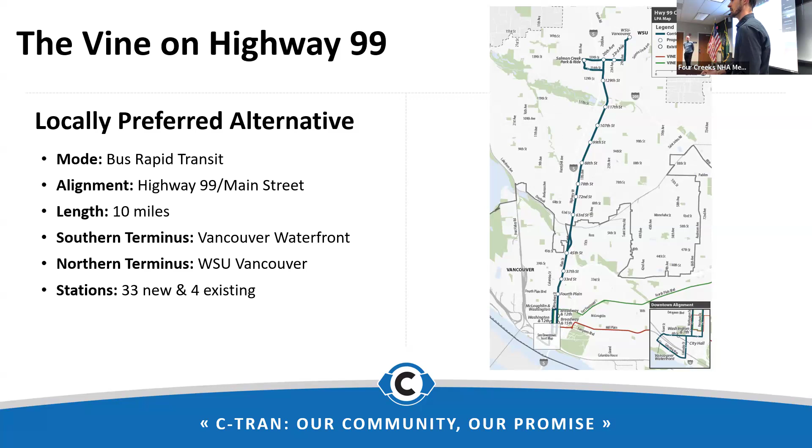For Highway 99, the alignment will stretch all the way from the waterfront in Vancouver through Hazel Dell and Salmon Creek with a terminus at WSU Vancouver. It's about a 10-mile corridor, a straight shot you cannot currently do with a one-seat ride, as the system now requires a transfer. The corridor will have 33 new stations plus 4 existing stations downtown shared with other Vine routes on Fourth Plain and Mill Plain.

Zooming in to the north end, closer to this neighborhood, there will be a handful of stations in the Salmon Creek area north of 117th Street. That includes Salmon Creek Park and Ride, which will be rebuilt and remodeled as part of this project to be more of a transit center. Previously, the Park and Ride was mainly for a couple of commuter routes going straight to Portland, with folks who worked over the river parking there and riding all the way down. With this project, the idea is to connect more local routes in the area to provide better connections to the Vine and elsewhere from Salmon Creek.

There are also a couple of stations along 139th Street at 20th and 23rd Avenue near Legacy. The terminus station would be on the campus at WSU Vancouver, currently served by Route 19, which has a stop adjacent to the campus on the west side at 29th Avenue.

Zooming in even more, the station at the campus would be a big change from what's there now. That stop is currently just on the street on 29th. With this project, the idea is to build a dedicated busway going up onto campus from 29th, doing a turnaround where the main loop road comes in from 139th. The station would be right against the road, with a bus-only lane allowing access to and from 29th Avenue.

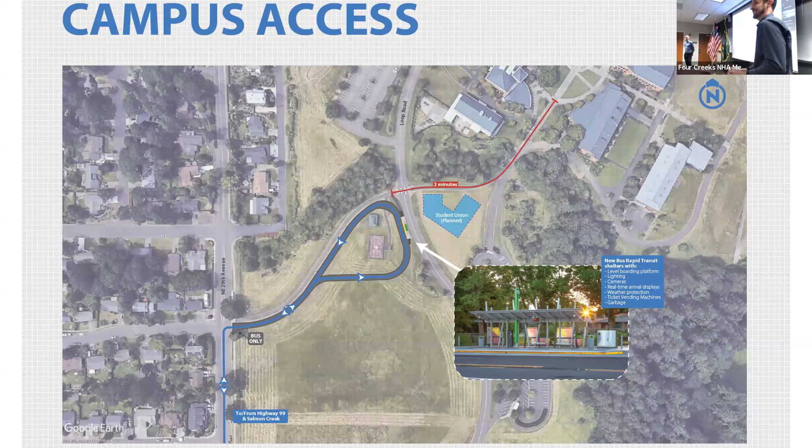It's the cross street here, is it 51st? 148, 140, yeah, you're right, 51st. Okay, I'm not sure what that is. That's okay, you'll probably know better than me. He knows. Okay, next slide, please.

Eric, that path that exists now, it looks like that graphic implies it's going to stay open as a walking path. Correct. Yeah, the busway would essentially be adjacent to that walking path, so it would still be available for folks using it today. To back up a little bit on the timeline of this project, that arrow is not quite where it's supposed to be, but we're potentially right in the middle right now.

So 2022 is when the project really kicked off in earnest, when we started the initial outreach to let people know this is an idea we'd like to do for Highway 99. That's when we gathered a lot of feedback from the business community, residents and others up and down the corridor, really going door to door. We had a series of open house meetings, both in person and online. And ultimately that led to the adoption of the locally preferred alternative for this project, which was last year.

So that really solidified what the high level plan was. And since that time, we've been in the more detailed design phase, getting into the weeds of what each station is going to look like, where it's going to be in relation to each intersection, what the design is actually going to take shape as. That's where we're at right now, about 90% design. So we're getting close to the finish line in that phase of the project.

And then the plan right now is to go into construction likely in the first half of 2025, with an anticipated completion in 2027. One thing, actually the next slide covers more detail on construction.

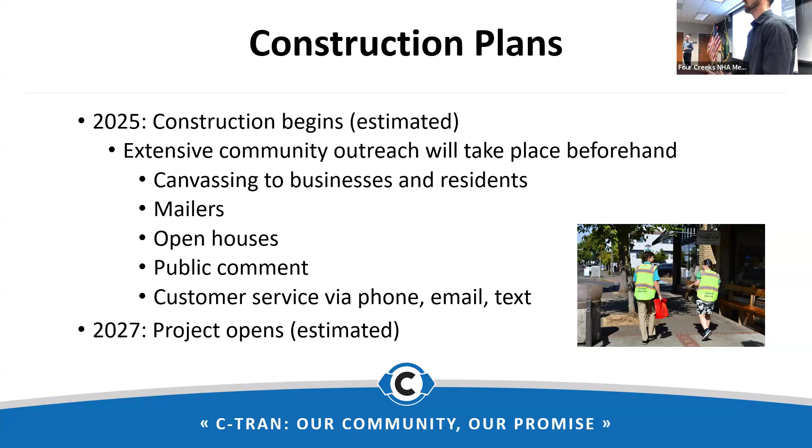Good question. Yes. Have you looked at any of the other projects, like all the ones that we're going to be talking about after yours, and looked at the impacts there?

Does C-TRAN work with the county and other groups? We do. We make sure that if something's happening nearby at the same time, we'll either try to avoid each other, or in some cases, like with Mill Plain, they had a big project tearing up Broadway, and we deliberately did our construction at the same time while that was already closed, so it didn't create an additional impact. We coordinate depending on what makes more sense for the area.

There's major stuff going on at 29th. We're losing some access points, and this could impact things. Appreciate you knowing that. We'll make sure we're coordinating as needed.

The reason was, with the analysis we did of travel time and the number of traffic signals it takes to get in and out of that site from Highway 99, it would have added close to 10 to 15 minutes each way, going up and down both directions. Ultimately it was decided that's just not worth the added time for a system intended to create more efficiency and a faster trip for folks generally traveling through that area, not necessarily going to 99th Street.

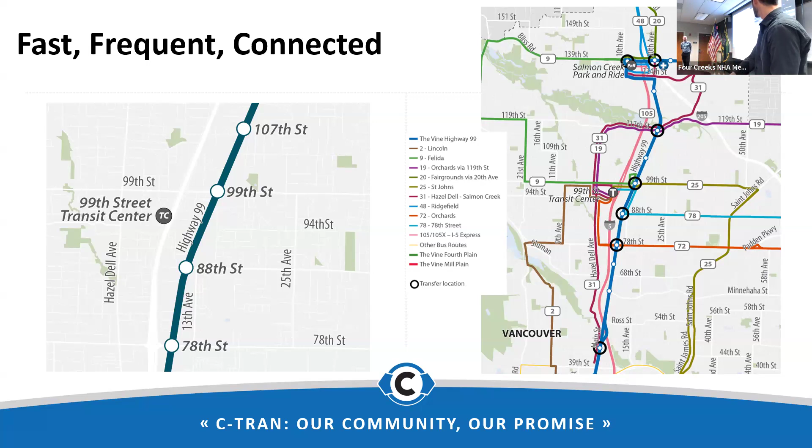Next slide, please. And then the last one for me - just to back up again, on Fourth Plain, when we built that project, Chuck mentioned a thing or two about that if you ever want to ask him about it.

That was the first Vine corridor that C-TRAN built, because Fourth Plain at the time, and today still, is by far the highest transit ridership corridor in our system. Mill Plain was the second and is the second highest ridership in our system, so that made sense for the second corridor. Highway 99 is the third, for a lot of reasons including ridership, but also the forecasted growth of thousands of households and thousands of new jobs in the next two decades, potentially.

We've got a corridor overall, not just on the north end of Salmon Creek, but the entire corridor that exceeds averages in many of the community groups that historically use transit, such as folks who live in or near poverty, folks who identify as minorities, and 10% of the population on this corridor does not have a vehicle, which is twice the rate of Clark County as a whole. So it really fits a lot of the criteria to make it a good candidate for this type of service that would benefit a large number of people.

And the corridor as a whole has a really wide variety of different types of environments. There's a lot of commercial, residential, some major destinations, grocery stores, schools, urban areas, a little bit less urban. So it's really an ideal transit corridor for that reason, just because of the diversity of the environment that it serves.

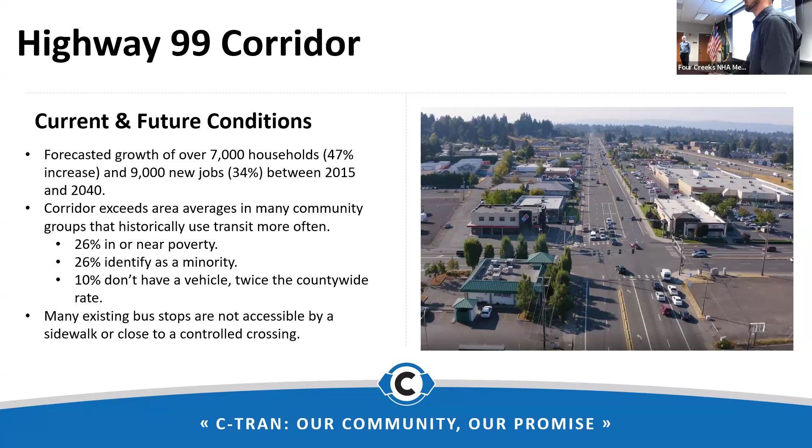With that, I think I'm going to turn it over to Jay for the rest of this presentation, and what to expect once we get toward construction on this corridor specifically.

Thank you, Eric. Hi everyone, I'm Jay Houseguard, Community Engagement Coordinator with C-TRAN. I'm going to talk through some of the specifics of bus rapid transit, and then what the stations might look like, some of the cool features that are involved as well.

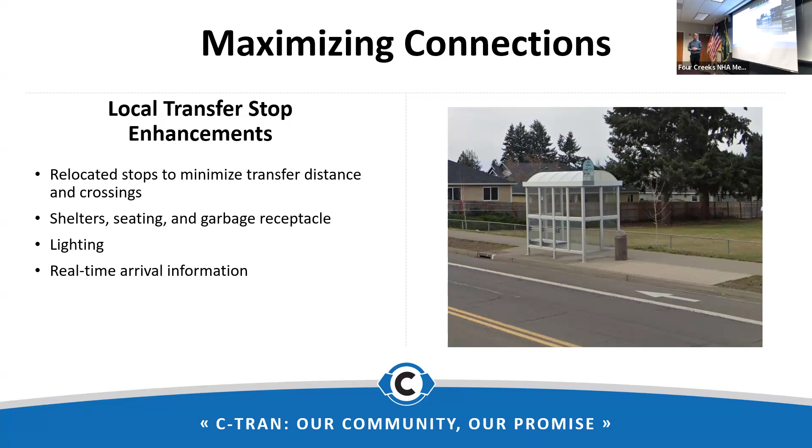Rather than checking in with the operator, the bus driver at the front, you can actually just get on through the doors in the middle or rear of the bus. You can buy your ticket ahead of time—there's a pay station outside before the bus gets there—or you can pay with a HOP card as you step on. You don't need to interact with the driver, which creates a much faster process. And that's what this is all about, efficiency.

It comes more frequently, even on the busy corridor, than some of our other bus routes. So just a lot of enhancements. An example here is the windscreens, protecting from the elements. There's additional seating, a trash receptacle, and the real-time arrival information is on the screen there. There's overhead lighting and a security camera up above for safety.

And then the platform itself is also more level with the doors to get onto the bus, so for someone with a mobility device or a bicycle, it makes for a much quicker access point getting on board. There's also three bike racks on board, whereas on our traditional buses you have to pull the bike rack down in the front.

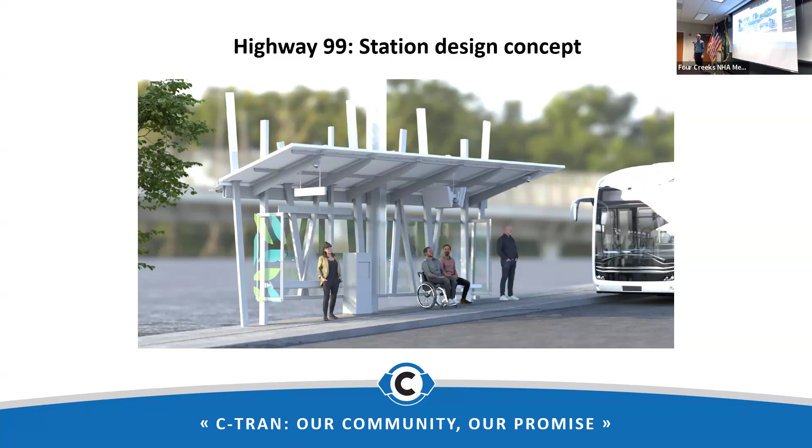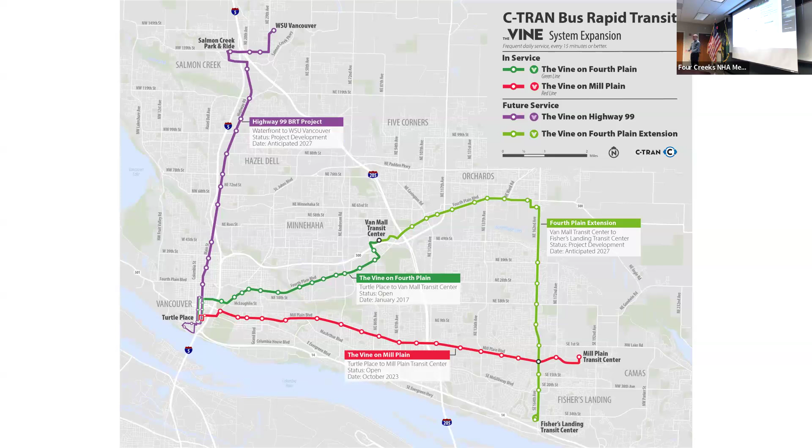That's great, it's exciting, and they really are successful. We found that after the first Vine on Fourth Plain was built, very soon after there was an increase in ridership for what we call revenue ridership - revenue producing rides shot up soon after it was built. Everyone was excited about it. It really helps with operating costs and the efficiency of transporting so many people on a higher capacity bus.

That's the end. Yeah, questions?

So what does this do to the existing routes? Are you reformulating those based on these new Vine routes? Yeah, so an example is right now on Highway 99, we have an existing bus route, the 71, and this is going to replace that, and really allow for better connections into the larger system. You can go all the way down to the waterfront - right now, 71 doesn't quite even get to the waterfront, it gets to around Esther Short Park, City Hall, but this will take you all the way to the water. It'll connect into the system we have, ideally with that one map where you saw the larger black circles connecting into other routes that get you east and west as well.

Usually a major project like this does involve some sort of realignment of the connecting routes too, just to make sure everything works as well as possible. This project specifically will replace the 71 and the 19, which serves Salmon Creek right now to WSU. Once we make those other local route adjustments, it won't be done in isolation. Mill Plain, for example, when we opened that Vine corridor last year, it coincided with the opening of an entirely new transit center on the east side of that corridor, and we shifted a couple routes to make those connections work as well.

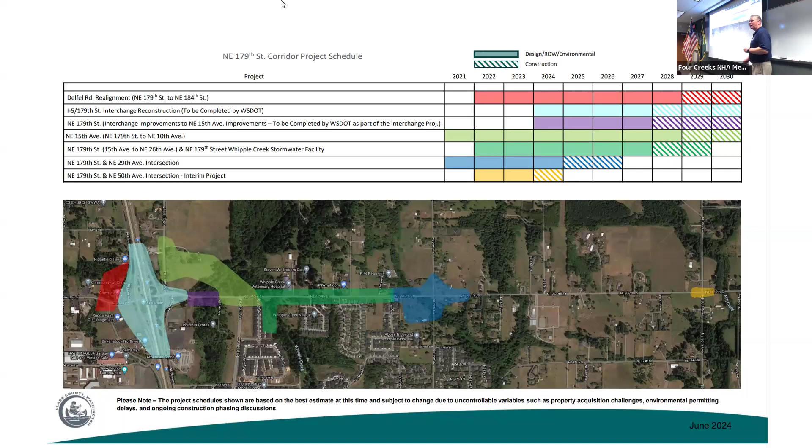Yep, let's jump to the next one. I'll go all the way down this pipe for you, I'll take you all the way down. So this is the big picture, okay?

The one thing I do want to make sure you understand is that this is the long-term project at 50th. We did an interim project where we added those left turn pockets on the east and west leg. This is what that eventually will be going in. You can kind of see it now, Phil. The plan is to line the north leg in with the south leg.

The interchange is going to be coming in, fixing the on and off ramps. We'll have the section between the interchange and 15th, which is going to be a multi-lane roundabout there. And then we'll be bringing 15th Avenue up, because when the interchange comes in, it's going to eliminate the connection of 10th into 179, and the same thing with Delfel. That's why we're getting those out of the way.

And then, as I mentioned, there's the stretch between 15th and 29th, and the improvements at 29th. This shows you the contour change that's going to happen for the alignment in order to get it up to the standards needed for this type of traffic flow. Next slide—oh, go ahead.

What's that big dip there? This one right here? Yeah. So as you go past 29th, you go down a big hill—there's the horses and stuff. Yeah, or a bridge, most likely. Bridge, yeah.

So Scott, just with the apartments going in at Southbridge...

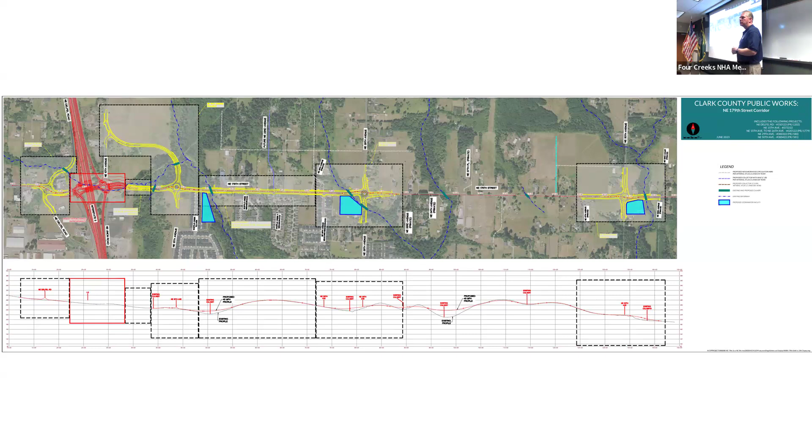Okay, next slide. So this is what I mentioned about at 179th and 50th. We're just wrapping up construction on this one now. For those of you that were inconvenienced, I apologize. Les will talk about his sewer work and the closure at 29th. We have this one going too, so if you lived in between, there were times that you were affected. I apologize for that, but I think it's going to work a little bit better. It's supposed to last until about 2035, based on traffic volumes, at which point it needs to go to a larger roundabout.

I do have a question about this though, because on the east side, northeast side, it is so steep. They did not put a railing on that side. It is there now — if you're talking about the guardrail, we had to wait till Lumen got out of our way. Is it there today?

As of today? Yes. If you're talking about right here — I didn't go that way today. Yes ma'am, go — okay, it's there. I'm so happy, because yesterday, but not today. Every time I drove on that, I was like, oh dear. I know, it was scary. Okay, so they put guardrails there.

Yes. County is not alone with Lumen — we've had so many issues in Ridgefield. I think they had an implosion internally. That's the only thing I can think of. Okay, so we're done here, that was that first one.

What's the yellow grid across there? Right there, all that — wetlands, I think. Most likely. And typically what you see, I think, is property boundaries and those kinds of things.

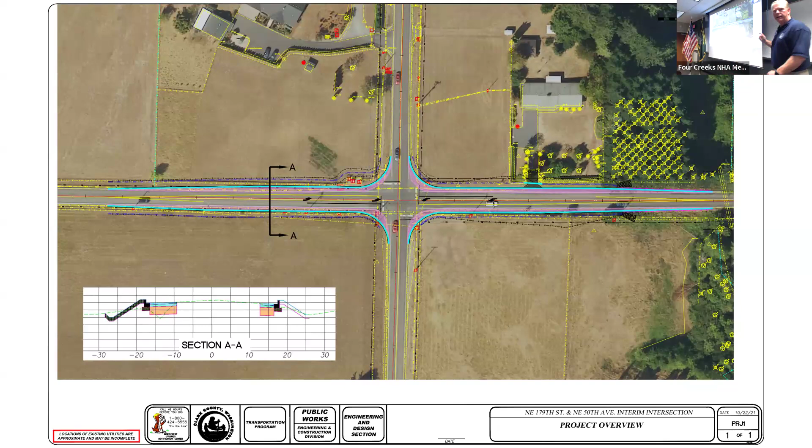So this is the big one you're going to be seeing over the next two years — 179th and 29th Avenue. Right now it's a signalized intersection. The topography is pretty tough. We're coming in, we've got two bridges to build, one here, a big roundabout that we have to level, and some pretty good sized walls we're rebuilding. It's going to be a pretty big construction — roughly 18.6 million is our engineer's estimate right now. It's a big chunk of change, a big investment for our community.

What I'm going to show you next: when we do a construction project and put together plans, we have to put in place, if it's a rather complicated one, a staging plan that we give contractors to bid on, so everybody bids on kind of the same thing. What I'll show you is our proposal of what that staging will look like. We want the contractor, once under contract, to tell us if there's a better way to do it. So understand this is our idea — we may come up with a better one because we don't know their resources or tools. Hopefully they'll give us something that opens that road up three months earlier, that type of thing.

Sir — when I'm up in the new Costco area, I'm just moving into this area new, so pardon my ignorance, but it seems like roundabouts are more of a liability than a help. Why are they doing roundabouts as opposed to actual stoplights? Well, people have different opinions on this, but what I've been told is that studies show roundabouts are safer and less expensive in the long run.

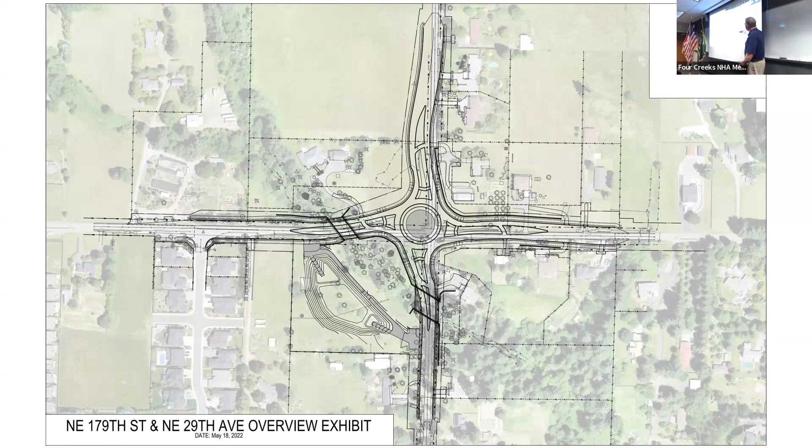Okay, so what you're going to see next is the staging plan that we're going to put into the construction documents for them to bid on. Ready? All right, first year.

So probably a whole year, they're going to be focusing - we're recommending they focus on the south, west, and southwest area. So the south leg, west leg - build the bridges, build the stormwater facilities, get this all built. In the meantime this stays open for traffic, but this will close and this will close, for the first year. That's what we're estimating, because you've got to build 2 bridges.

You've got to do a lot of grading, you've got to build a lot of walls, it's a lot of work there. And we have restrictions on when we can work in the water. Right, okay, that's first year.

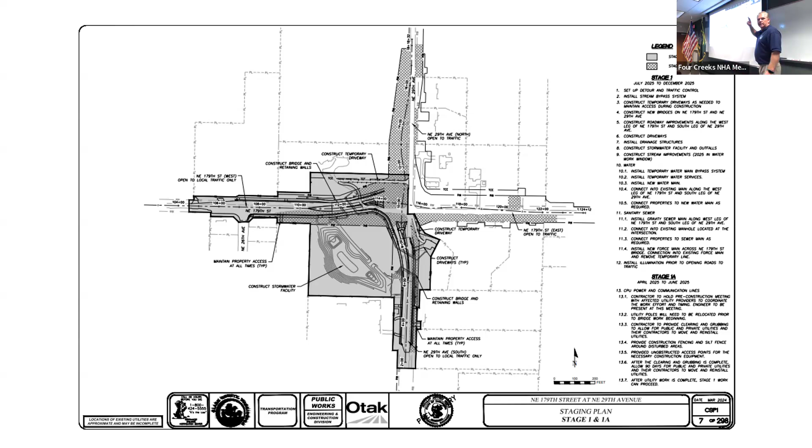Next page - then we're proposing that they move over to the east side and then the north side. At this point we're closing the whole thing, and this is going to take about 6 months.

Next one - and then this is the final phase, final 6 months, focusing on this last leg on the east side and then finishing up on the north leg. At this point the south leg, west leg, and north leg are open, and then this would be closed.

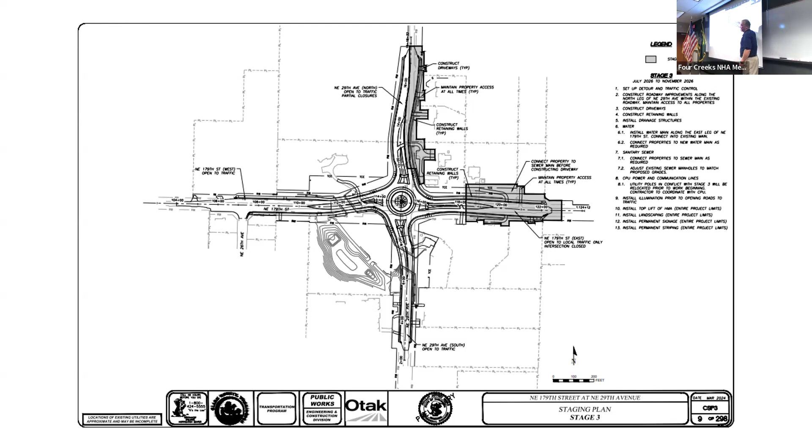So what I'm hearing is the people that live east of 29 are not going to be able to get down 179 for 2 years. Did I hear that right? That's what I'm seeing, I think you're accurate. Yes, you're right.

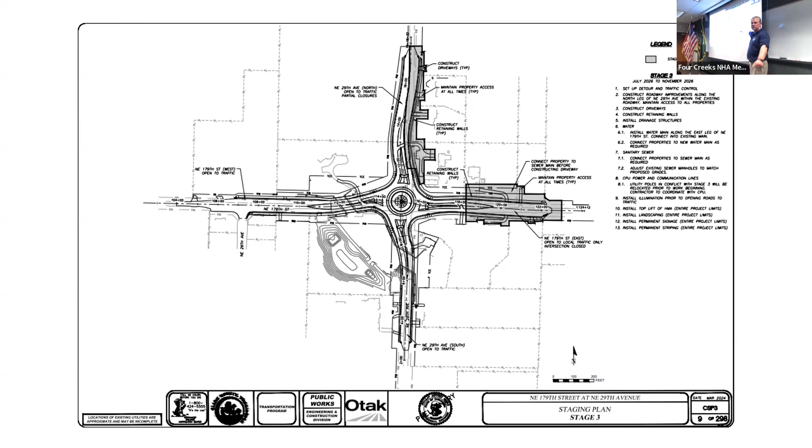Okay, so next let's talk about what the detours will look like. So we talked about that first stage - what will be required then for through traffic, bringing you up to 199. Okay, next stage.

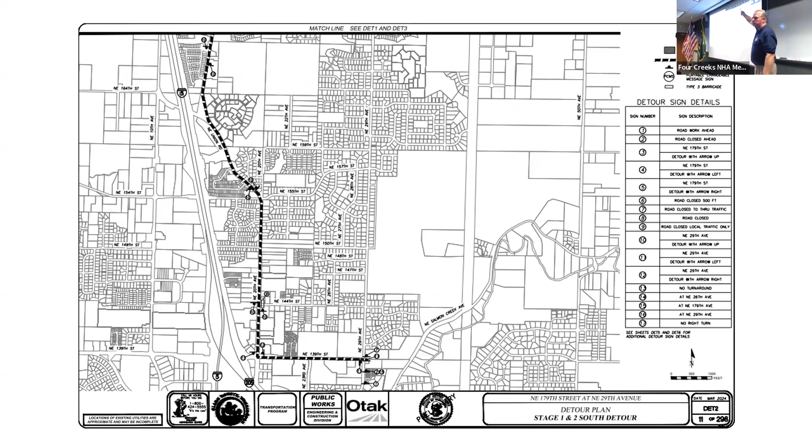On the south side of 179, what we'll be recommending is people go over 139 up to 20th, without 15, because they won't be able to access 20 to go through.

During that second phase, at this point we've closed off all lanes, and now we're diverting you over to get through. The south side pretty much stays the same - just clarifying that for my notes.

So the portion where it's going to be closed sounds like it was between the end of year 1 and 6 months - it's basically the 6-month period, right? That's right.

Battle Ground School District picks up kids just south of 179, on the east side of 29. So they're gonna have to go - what's their route to pick up the kids? That's the only route they have, there's no other roads. All the way up to 199, across 10th, down 15th to 158, and then back up.

How are they gonna pick up my kids? I live on 47, my kids are gonna be in kindergarten next fall, but 47 is right there. So they're gonna have to put down 50th and back - how are they gonna turn around?

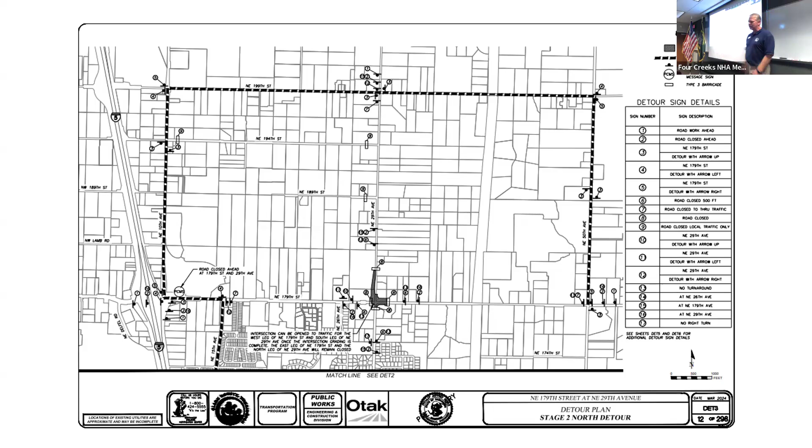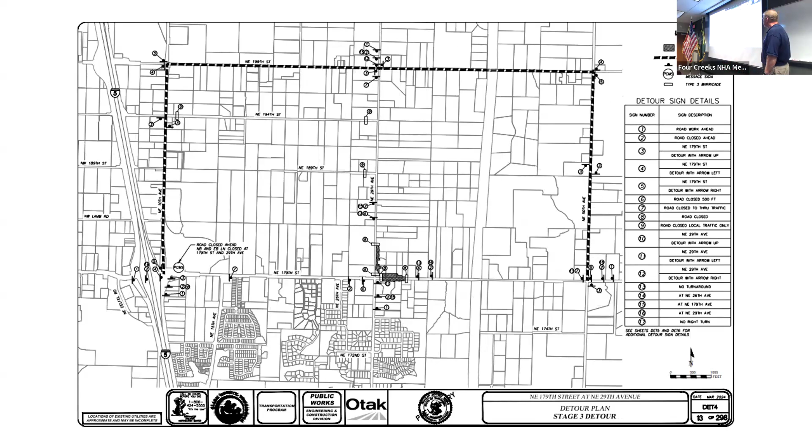This is the final leg. At this point now we've opened up the south leg, and then this leg is open, but this one is still closed. Right, so we'll still have that open.

Well, let me go back to 29th - so we've got almost all our permits, right? They've certified right-of-way, we're in the process now. We've got 99% done with the design. As soon as we get our final 2 permits, we'll be submitting to WSDOT, who represents Federal Highways. They'll review it, say okay looks good, then we go to bid.

Remind me, you're anticipating start in 2025? Yeah, we're hoping it won't take WSDOT as long as it has been taking, bidding in May. So like mid-25 to mid-27. Correct. There was some conversation about a bunch of utility poles on the corners - is that gonna be done as part of the shutdown?

We've been working closely with Public Utilities Electric so that it gets done during the shutdown, because we have to do grading work before they can put their poles on location. Same thing with Clark Regional Wastewater District - we're including their plans with ours to do the sewer work and water work at that intersection at the same time, instead of as separate projects.

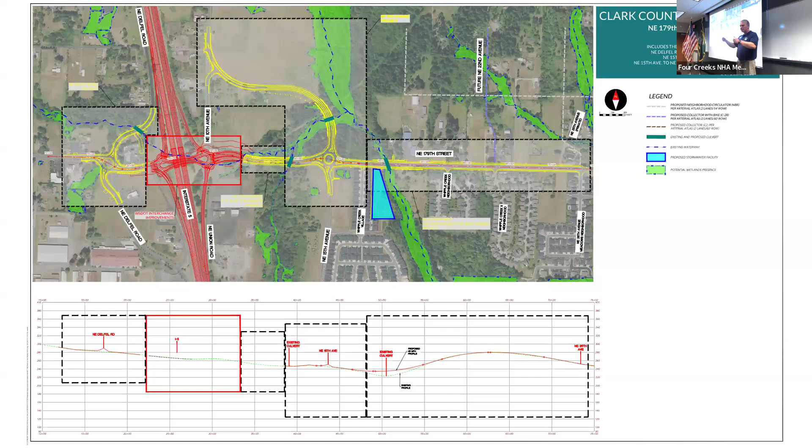Let's keep moving, because I have a little less time. It's not that I'm saying that's not an important road to go down, but is this where you want me to be? Or did I go too far?

Let's go back. Okay, so do you guys know about that project? This is the one that is coming next after 29th. Am I in the right spot? We're building the roundabout, we're building the bridge, and then we're completing the improvements connecting what we did at 29th. Where are we now? This is between 15th and 29th.

Initially, we're building it so that it's a single lane in each direction with a center turn lane, a two-way left turn lane, with some right turn drop lanes. Similar to the roundabout, we're building it for the ultimate, eventually 4 lanes.

I want to mention that that is not the same roundabout you were just talking about, that's the one at 15th. So 29th is here, 15th is here, and Delfel's on the other side of the freeway. Right now it's a T with a signalized intersection.

Is everybody with me? What about the interactive map that you guys have on the county website? This doesn't include a lot of the stuff that's on the interactive map, we're working on that. I've actually been working with Kaylee to get this one updated.

So the decision to add the roundabout was actually relatively recent. Before, we were just building this portion, but the decision was this might be better to build it all at once, rather than multiple roundabout projects, like right here on the right corner of your screen on the interactive map - there's another roundabout there.

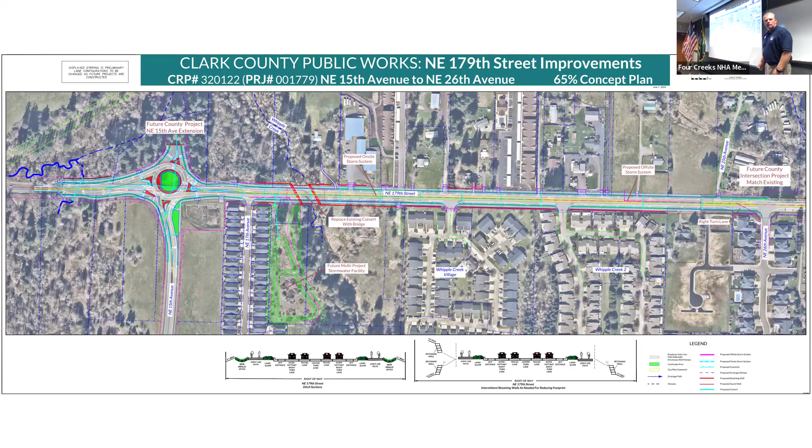Oh, she's got a clock. I think we do need to move forward because we do really need to hear about this. Okay, so this is 15th - this is the portion that will be built on 15th that will connect you up to 10th. Next one, please.

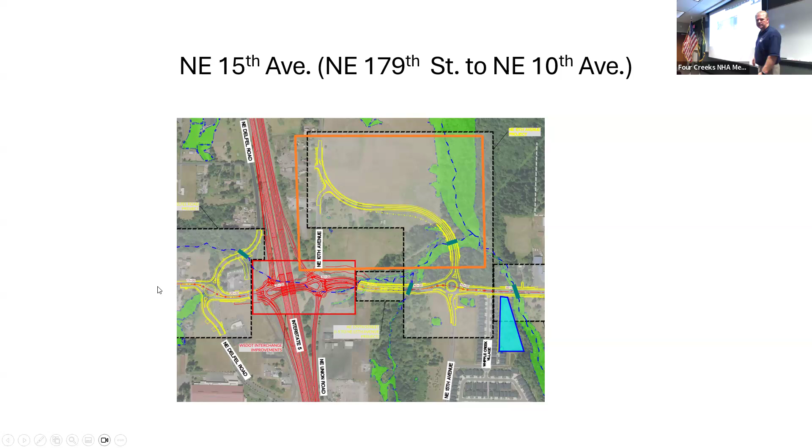Yeah, I agree too. The plan in the transportation improvement program is to focus next on 29th to 50th, sometime after 2030 - again, a lot of money they have to get. And then, as I mentioned before, after 2035, going to a roundabout.

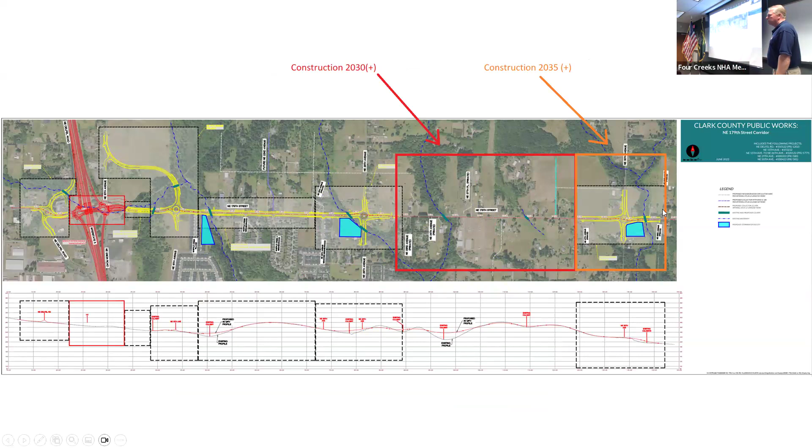So Scott, Jeremy and I have been having discussions for months, and one of the reasons we asked you to come here tonight was to do a lessons learned about the 50th intersection. While I appreciate all this information, we've been seeing this for the last 2 years now. We do need to do a lessons learned about the 50th intersection, because a lot of us were trapped between the two.

There was no communication that it was being closed down. I know somebody was on maternity leave and wasn't able to write the Russian translation that needed to go out in the mail. We've got to talk about this kind of stuff going forward, because closing things down and not notifying people, that's bad.

You're right, absolutely. I would like people to have an opportunity to talk about their experience with closing the 50th intersection quickly before we hand it over to Les, because that was really what Jeremy and I had agreed to having you here tonight was to do that activity. I'm sorry, I think everybody... I've done the rest of it. So I apologize, I'm sorry if he didn't tell you that, but that's what he and I had talked about. That's okay.

What I do want to say is the intent of building 50 was supposed to be under traffic, so when we built it, the intent was let's keep traffic flowing the best you can. Now when you pave and do things of that nature, you have to stop traffic to do that, but we never really shut the traffic down for an extended period of time. But there were periods of time. But you couldn't go to 29 because it was closed. Exactly, right? There was a sewer line you could... Exactly, tell us about it.

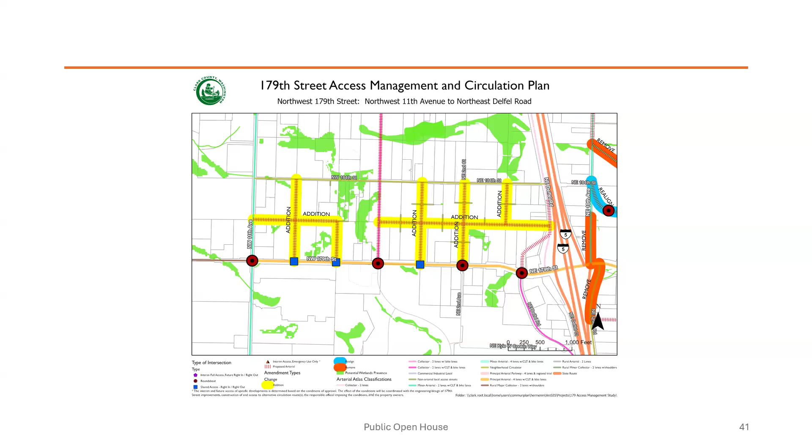Yes, hi, I'm Kaylee. I'm the one who was on maternity leave, so sorry if that was inconvenient. You don't have to be rude about it. Well, you don't have to be rude to us as well. I don't think there was a lot of tension. I don't think I was being rude, so you don't need to be rude to us the way you were. So this is all being recorded.

Well, what I'm saying is that it was inconvenient because I don't have someone who can do my job for me, to send a mailer telling people that the road is closed. Correct, nobody in your office can do that. I left instructions trusting that they could, and I came back and they didn't, and I can't answer why. So are you all hearing this?

Nobody else in the county except Kaylee right here can send you a message saying that the road is closed. That has to change. That is not what I am saying. What I am saying is I left instructions for, hey, if something like this happens, here's how you get a mailer out. When they had issues with getting information, from what I understand, they were waiting on final information from the contractor before they could send it to translation, which is required because we received Title VI funding, before they sent out the mailer. I would have done things differently, because what happened is they got the information from the contractor too late to send out the notice. Okay, so I came back, I heard that didn't happen.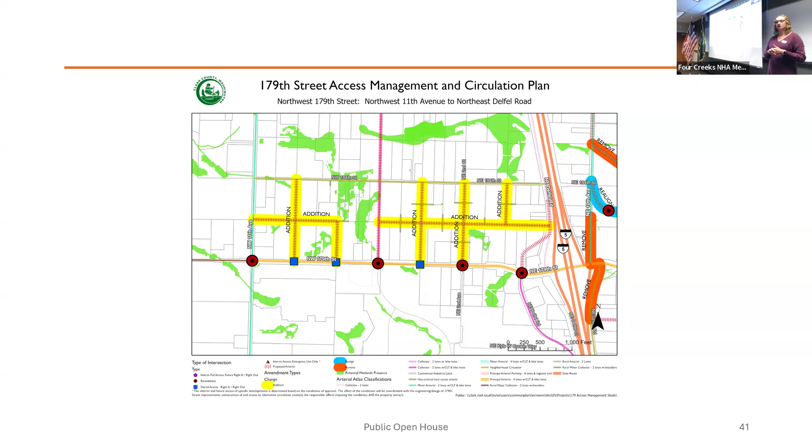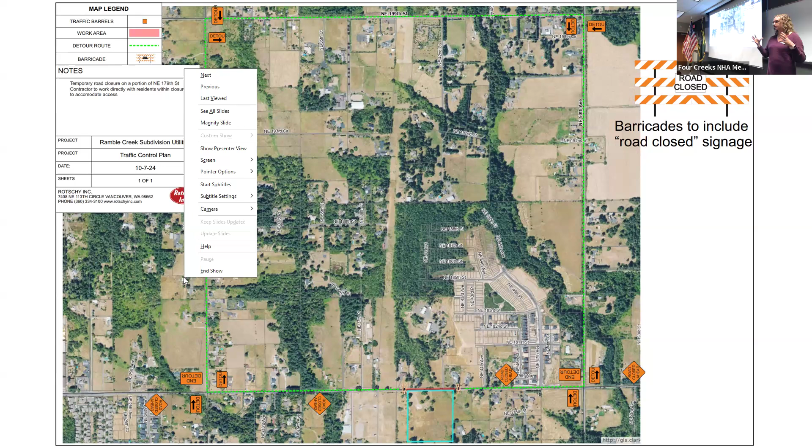What can we put onto the internet now that gets us onto this website? Just go to clark.wa.gov, click under departments and public works, and it's right there in a big green button on our homepage. We send it out weekly, but you can also sign up for different types of alerts—you can sign up for the weekly digest of construction, we call it construction traffic delays.

Keep in mind this is just for county roads. We try to link to information for WashDOT and city streets, but because those are other agencies, sometimes we have to remind them, hey, we're over here, can you pass us that information? So we try to link to their information, but it may not be as up to date as the information for our projects.

And then you can also sign up for road closures if we have an emergency one, due to weather, or—tonight I got a call that a trench on a construction site collapsed, so we have a road closure somewhere else. Anyways, you can sign up to receive those sorts of alerts as well.

And as for what happened in Woodland this summer, that was a WashDOT project, so I can't really speak to why. That's over.

Yeah, so that big green button right there. It's right here. Oh, okay. Can you send out that website address? I can't read it. We can put it in the notes, on the website.

So when you click on it, this is what you're going to get to fill out. Then you can sign up for parks projects, road and transportation projects, stormwater, clean water projects. And road and transportation projects will be whenever we send out a mailer, we'll send a PDF. And this is the road closures, and then the weekly construction traffic updates. That is a digest of a page we already update weekly, showing where road closures are, or even when we restrict traffic to one lane, or there's any sort of delay, we'll put it on that page.

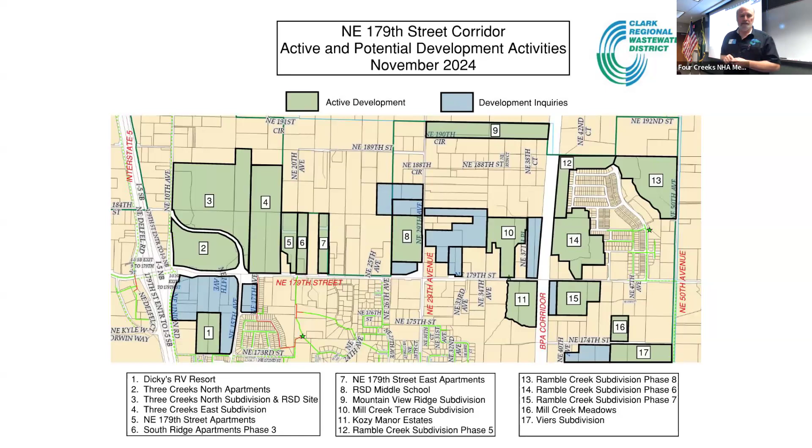So we'll zoom in a bit. On the west end, we just spent some time with Scott talking about what's going on around the interchange - I-5 here, 179th, the Delfel area - and the changes he was reviewing, including the 15th Avenue realignment. The lines in blue represent sewer that will be installed in those areas. Some of it will extend service areas off to the west in Delfel, where we don't currently have sewer lines. Some of it is being done to support removing pump stations and putting in gravity systems instead, which are more efficient and less costly long term. Some of it is extension to serve developments, such as Three Creeks North here.

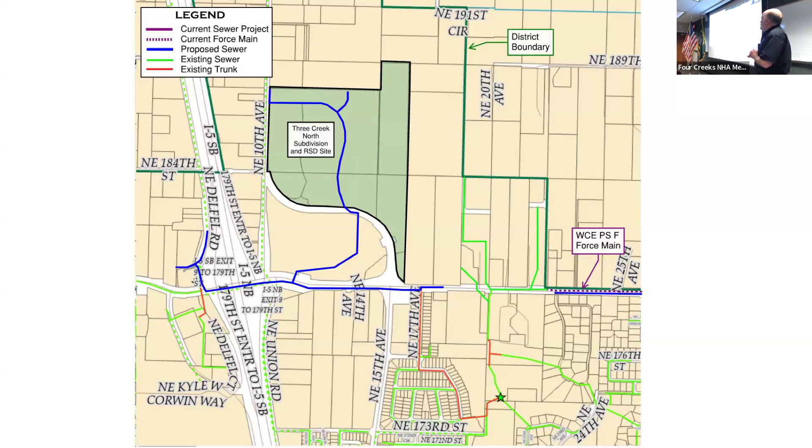These circles represent project footprints where we're coordinating between the county and the sewer district on installation of infrastructure. Scott talked a bit about what's going on in Delfel. For the Delfel project, these sections west of the interchange, and frankly under the interchange, will install sewer with the county's project, so that sewer will go in at the same time.

The green one in the middle is developer driven, meaning it's on their schedule. We thought they would have built it by now - Three Creeks North has been around for a decade and keeps getting delayed and delayed. We've actually approved the construction drawings for this sewer line from here all the way up. Their sewer line needs to be in before they start building apartments, yes, absolutely. They build it with their own contractor once they get our permission. We've been coordinating with the Department of Transportation about how to get through the creek area, since there's a creek realignment through this section - how it's going to look, how it fits into the county's road work on their multiple projects. But right now this section in green is on a developer schedule. If they don't get with it one of these days, we're going to convert it into the county's road project and get it built that way, at least within 179.

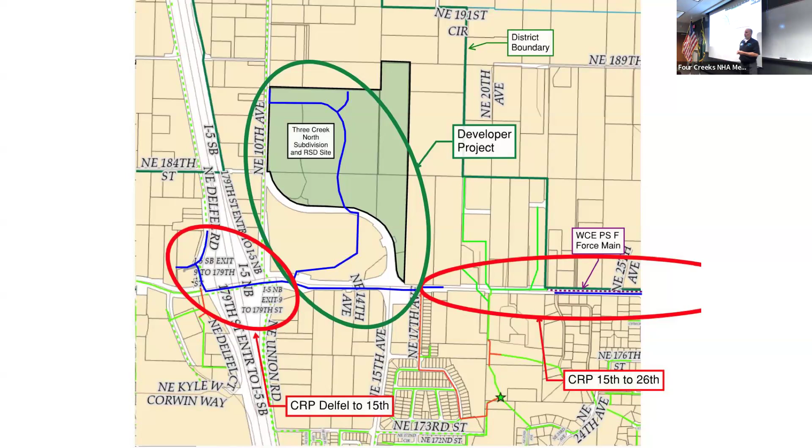Now, moving to the east of there, I'll orient you a little bit. 29th was the roundabout project here, BPA corridor, and then 50th is just off the screen to the right. So here we see some of the more major, active projects right now in green. I didn't show them all, but just those having a particular effect.

First and foremost, the Ridgefield Middle School site. This is the project that needs sanitary sewer to serve the middle school. They are constructing this purple line in 29th Avenue, and then the deep trunk sewer line - which you've all experienced this fall - coming all the way over to what will be the Whipple Creek East Pump Station. So it's going into the road. That's the 3-month closure, the one that just finished.

This is the 29th intersection right here. They have constructed this deep trunk line, a 15-inch sewer main, from the pump station site all the way to here. That's done. They're working on this piece up on 29th right now.

We received notice that next year they're going to close 179th Street. The other part that goes along with this is the Mill Creek Terrace subdivision. They're at the stage where we're reviewing the first set of plans. In fact, we just finished reviewing the first submittal this last week, so they're just getting started with plan review with us.

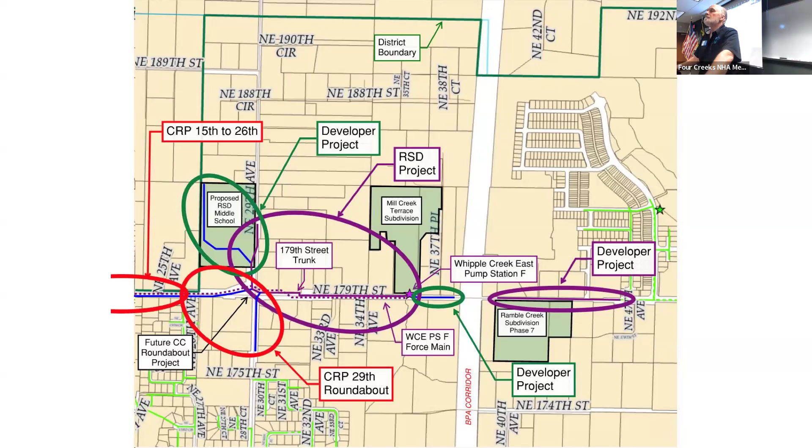Where does the flow that's east of the BPA corridor go? Does it go east or west? Okay, next slide please. Pump station.

It looks like on 50th there's a pump station because I see a lot of electrical. So moving east, there is an existing pump station right here. Yeah, it was put in with what we originally called the Woodbrook subdivision, now Ramble Creek. That's the Ramble Creek pump station. That particular pump station will take all the flow from east of the BPA corridor, right over here.

It goes into the pump station, that in turn pumps down this dashed line, all the way down to the high school. So it doesn't have to cross the BPA. Does not cross BPA, it's a different portion of our drainage system. Yeah, we already experienced that closure. Yes, you have. And so that one continues on south.

There's another project down here called Viers Subdivision, it comes off the screen a little ways. That will be building another pump station in this area that will gather essentially everything from about just north of 174th. All of that will come into a pump station here at Viers, which in turn pumps north to this pump station, which then turns and goes right back past it on the way south. It's one of those weird things that sometimes happens in the industry.

That's the 50th Avenue corridor, its own separate section of the system. All of this goes down to the system by High-Tech High School, WSU Vancouver. It actually hits another pump station, pumps through WSU and points south. So all this is effluent. All this, I take it, raw - all these areas also need drinking water.

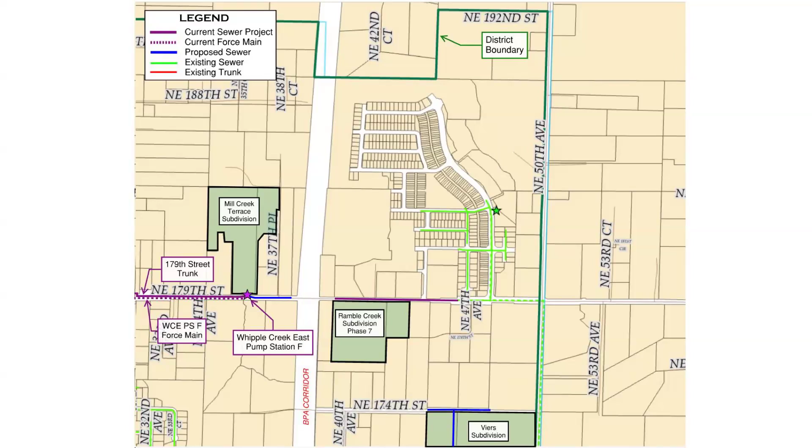Yeah, can you guys hear me all right? Yes. Okay, I was just curious about the Viers subdivision timeline for that pump station that's going in there. I didn't know if you had an update on that. I am also curious about it. It is the project that has been the longest lived development project that I've experienced in my time in the district. They have been in the land use and environmental permitting process, I believe, for 3 years.

They're currently designing the pump station. Now, we have not yet seen the submittal. I am anticipating something this winter, with a hope that maybe they'll start something on the ground next summer, but I'm not sure of that schedule yet. Okay, thank you. You're welcome.

Sir, here in front, you have a question? Yeah, if you've got a force main there, why couldn't they build a pump station on 50th and 174th and pump it directly into the force main?

Force mains of that size don't always play nicely together if you try to share a force main. If pump stations are trying to use the same force main, they have to overcome the pressure from each other. So in this case, they're in series.

So will the new force main go up 50th? They're already built. When Woodbrook built this, they also built the force main for Viers. That's one of those coordination things where we had them done together under one project.

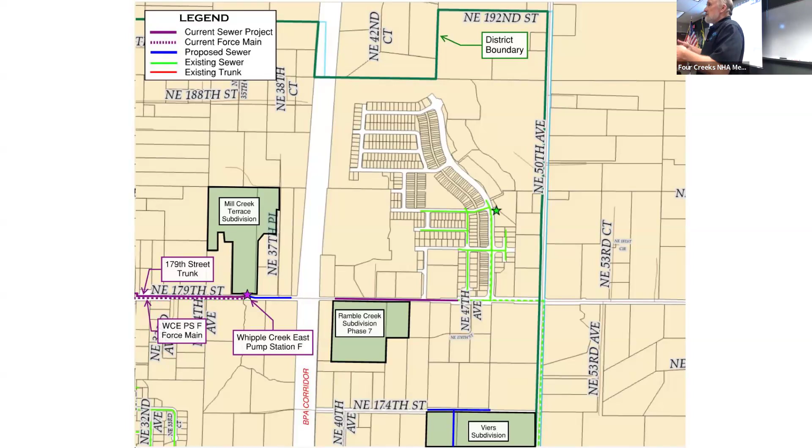Once the sewer is built and accepted by the district and it is available for public use, you would come to us and make applications to connect to public sewer. We have a whole application process. There are fees connected to that, connection charges, and plans required depending on the scale of what you're doing. But once it's turned over to us, it's an active line, available for use.

I'll get you my card and you can reach out and we can get you up to speed on that. So that's when you build those sewer lines, you want the future connections to be used, and you're not tearing those out. At times, and 179th is a good example where we have done that.

So if you wouldn't mind going back two slides, on this stretch, because it's a really deep line—and when I say really deep, wherever they did boring under the hill, I think it's about 40 feet down. A lot of this is in the 20 to 25 feet deep range.

And a lot of that was done because those hilltops are going to get taken off. So what's currently 40 feet might end up being 25 feet deep. But we needed that depth to be able to run that line from here all the way west to those apartments, because it's going to serve all of that area. It has to get across the creeks and on the bridges and under the roundabout and all those things. So that's why it's that deep.

But within that, can you move that? Within that area, there are service laterals, 4-inch diameter, sized for individual homes to many of these lots along the way, and we've got them on our plans.

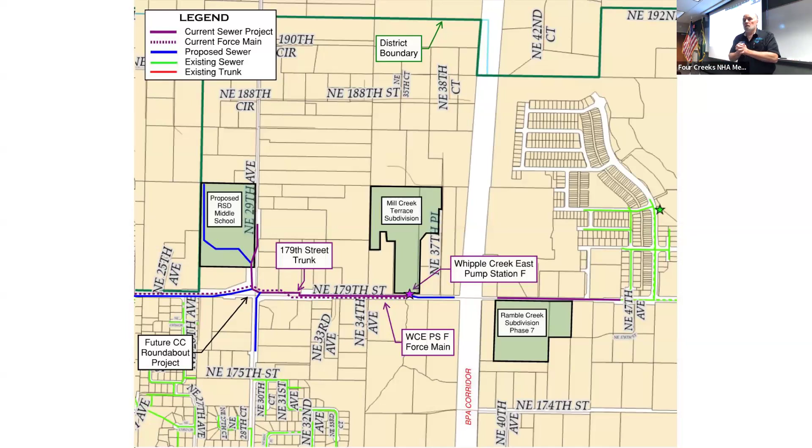Okay, I guess the one other item here is with Viers - there would be some work at some point that, under their schedule, they'd be putting sewer along the frontage of their subdivision within 174. So if any of you live out there, at some point there'll be some sewer line work along the north side of that development.

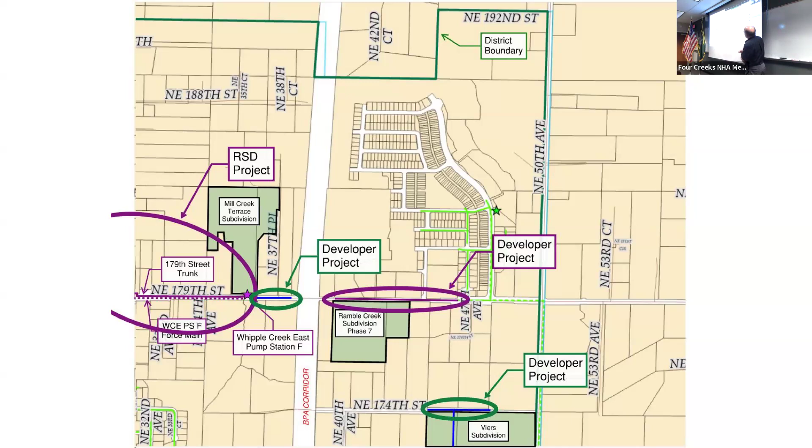I think that's what I have. So, questions? Update on Viers - they are currently under lawsuit appeal in the county.

Okay, I had not heard that. Scheduled for early January. Lawsuit appeal regarding what? Subdivision approval. Oh, just outright subdivision approval. Okay, I had not heard that yet. All right, thank you.